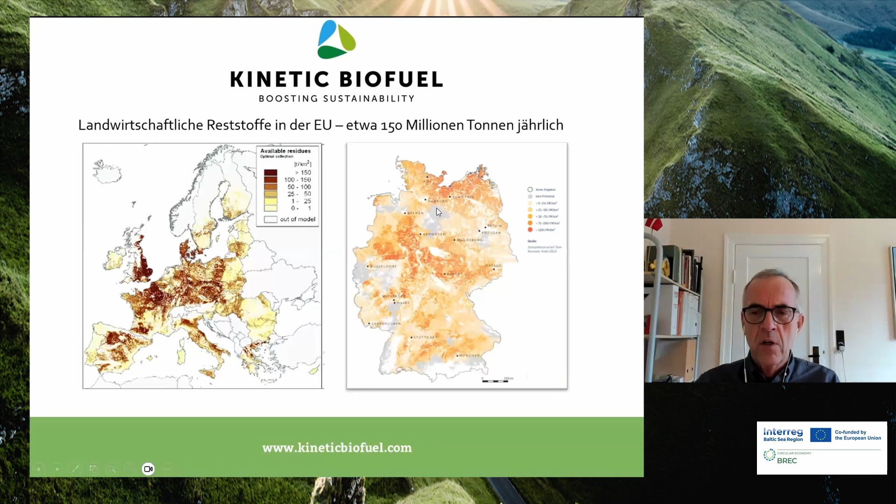If I go into a map of Europe and look for where straw would be available, you have the dark brown places—that's where straw is in abundance. If you look at the UK, the eastern side has a large amount of straw available. Even Denmark has a fair amount, and down in Europe you have areas as well. I haven't focused specifically on this region, this is just one map I have for Europe. Similarly for Germany, the dark orange areas are places where there is abundance and availability of straw.

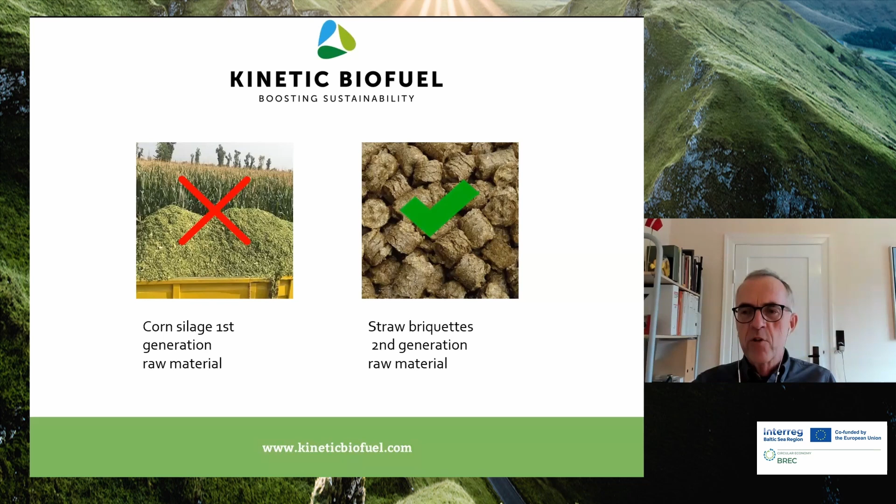Here we have the first generation raw material, and here we have straw already made into briquettes. What we say is that it's actually wrong to grow maize and other crops just to produce gas. This should be used for a different purpose. You should use straw instead, since straw isn't grown for this purpose, it's grown for the grains, and then the straw is a leftover that could be used.

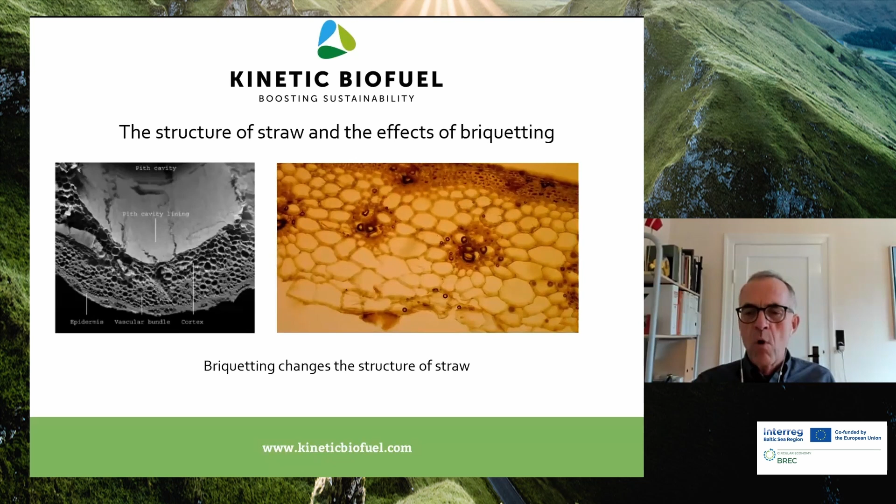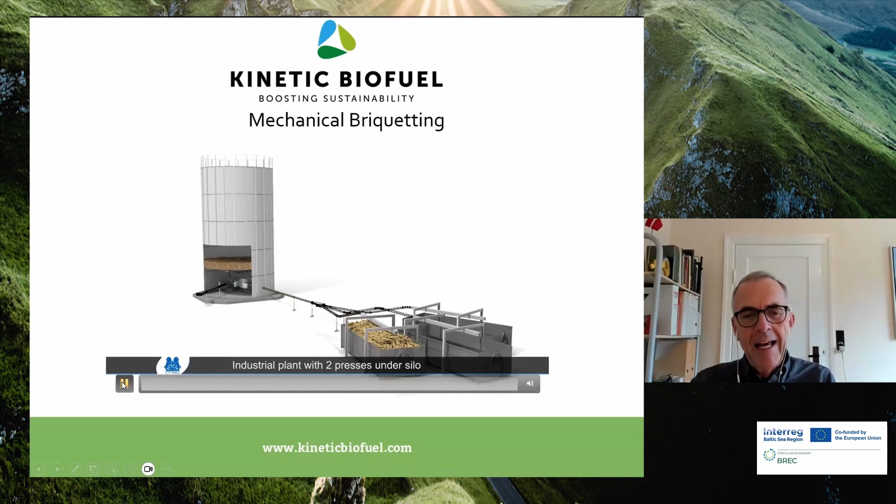Next I have a small video showing a unit of briquette presses, below in a silo. Here you see the raw material coming down. It's divided to two sides, falls down, gets pushed in front of a piston moving forward and back, making one long string of briquettes leaving the briquette press.

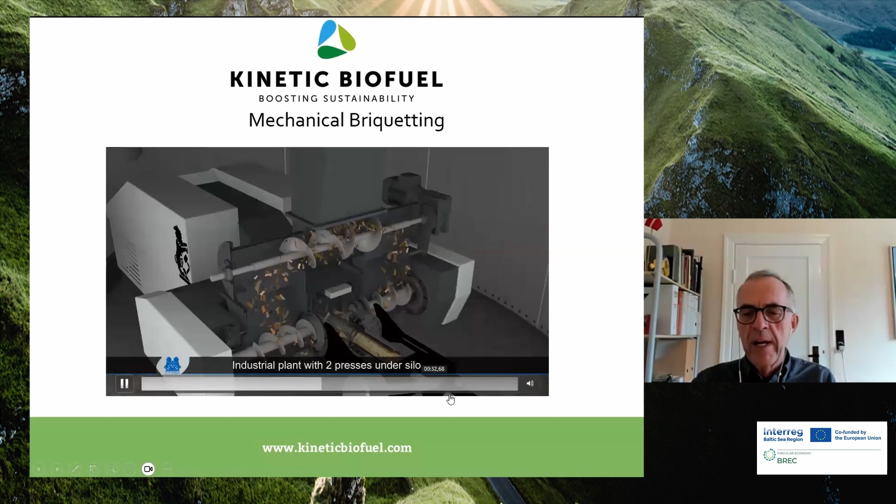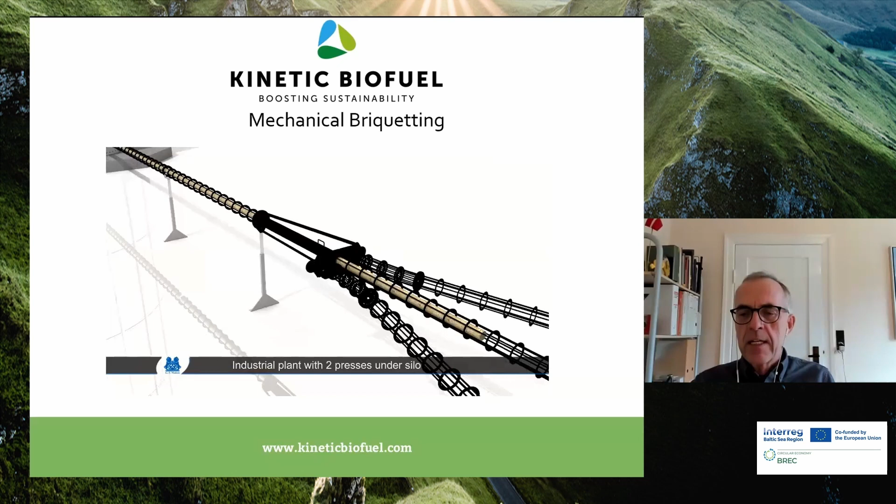In this case, you see it running out on a cooling line, and here it's being put into containers. But if you had it at the biogas plant, you could have it close to the reactor, and even feed it directly into the reactor right away. Very often our clients have them fall on the floor and use a wheel loader to take them to the reactor for feeding.

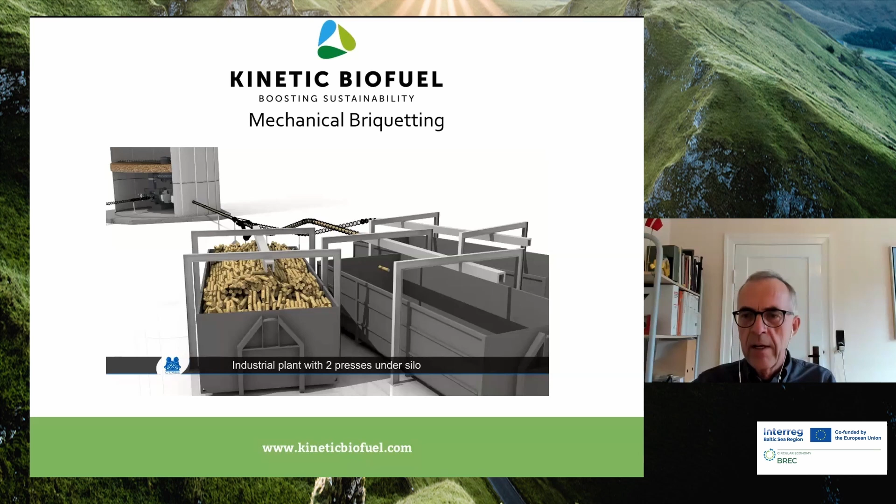Here I have a drawing of the briquette press. This is the center of the briquette press, a mechanical briquette press. It has an eccentric, similar to a crankshaft. When this one moves around, it pushes a piston forward and back. Here is the piston, and in front of it, you form the briquette as one long string.

Strokes of this piston run at 270 strokes per minute. So when the machine operates, it goes boom, boom, boom, boom, boom all the time. And by each stroke of the piston, you break up the structure of the straw.

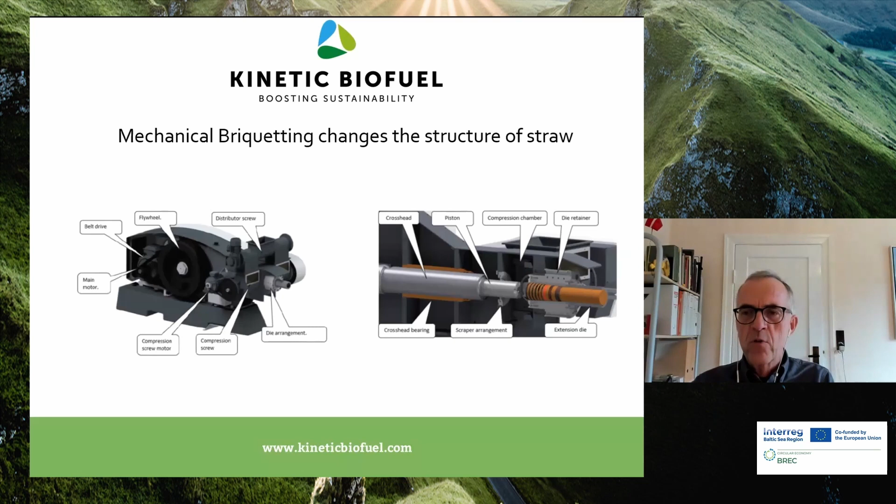Here we take a briquette and put it into water, and at the same time we took straw that was not briquetted and put that into water too. What happens after 5, 10, 15 minutes? The briquette becomes fully absorbed in the liquid, whereas the straw is still floating on top. So here you see that it went from hydrophobic to hydrophilic.

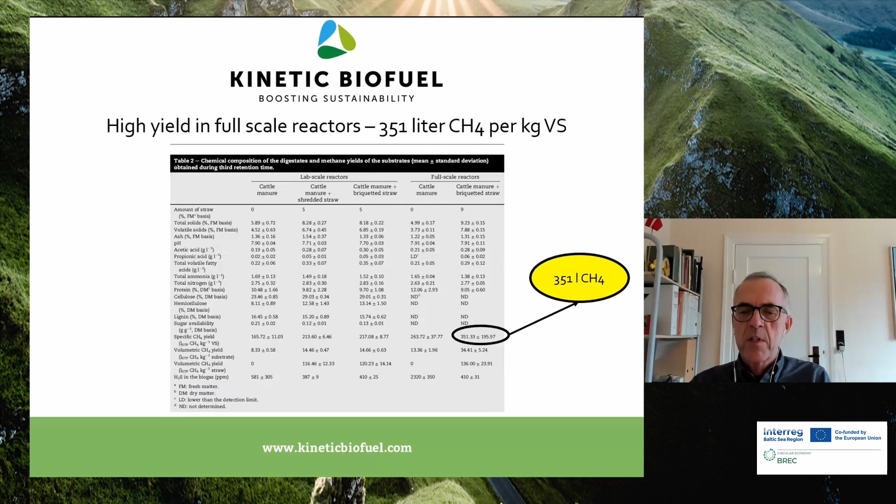A lot of tests have been done over the years with briquettes at university level. Here I took a sample where cattle manure is combined with briquetted straw, and you have this output. These figures can be found on our homepage, kineticbiofuel.com, where there are a lot of university reports that have been done in the past.

In these figures down here, I have the different types of biogas plants, the standard mesophilic and thermophilic, and other different types. Each type of biogas plant produces different amounts of methane. For the thermophilic here, we say it's 300 on this, but again these values can be found in the report. As written down below, the gas yield will definitely depend on what type of biogas plant you have and how it is running.

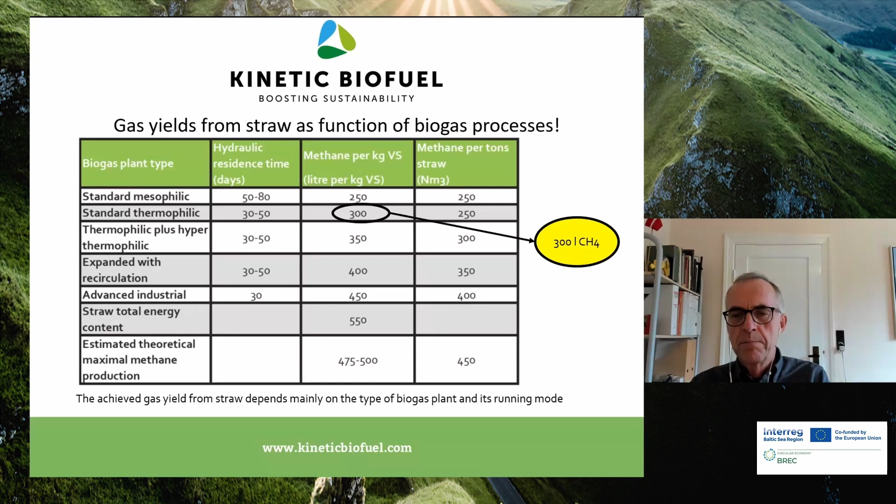At Aarhus University in Denmark, they have a research center, and we had a machine standing there for about 4 years. In this left picture, there is a straw line here behind my cursor. Behind this straw line, the straw comes in and gets taken apart in a hammer mill. It goes to our silo, then from the silo to the briquette press, and then you have the cooling line running away here.

The cooling line, in most years, ran behind the feed box here, and then came up to here, taken above on a conveyor, and at the top of the reactor it was screwed down into the reactor right away. So there was no storing, just usage right away.

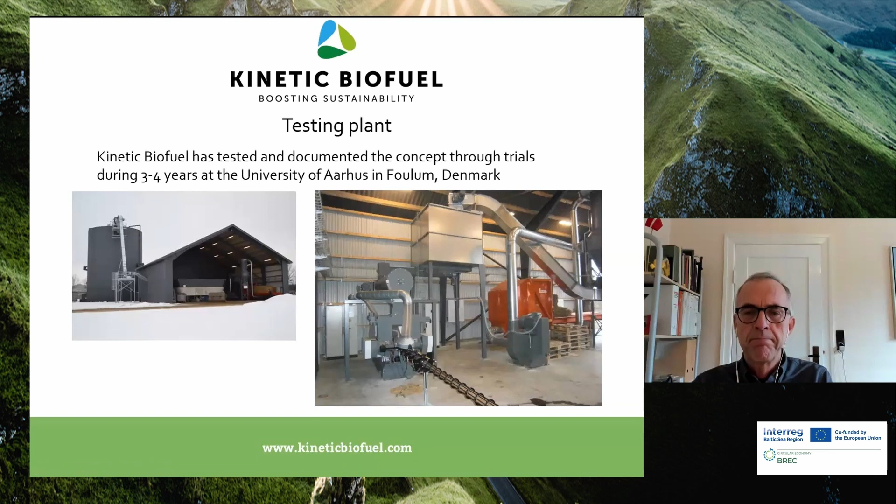What equipment do you then need to make briquettes? I have a line here showing what it typically would look like.

Here you have a bale conveyor. Bales would of course be different from country to country or farmer to farmer. In Denmark, the most common one nowadays is big square bales, around 500 kilos. In other countries it's round bales, but in this case it's shown with big bales. These big bales are put on a conveyor. On this drawing there are 5 bales, each 500 kilo, so 2.5 tons. This briquette press shown at the other end is 1.5 ton.

So that means you had more than 1.5 hours of production just on the bale conveyor, and there's even empty space. Maybe you could put straw enough for two hours production, and then you need to go back and put further straw.

The straw bales are kept together with strings, so either the person putting in the bales needs to remove the string, or you put in an automatic string remover. From here, in the shredder, the straw is taken apart, and when it's taken apart it moves forward.

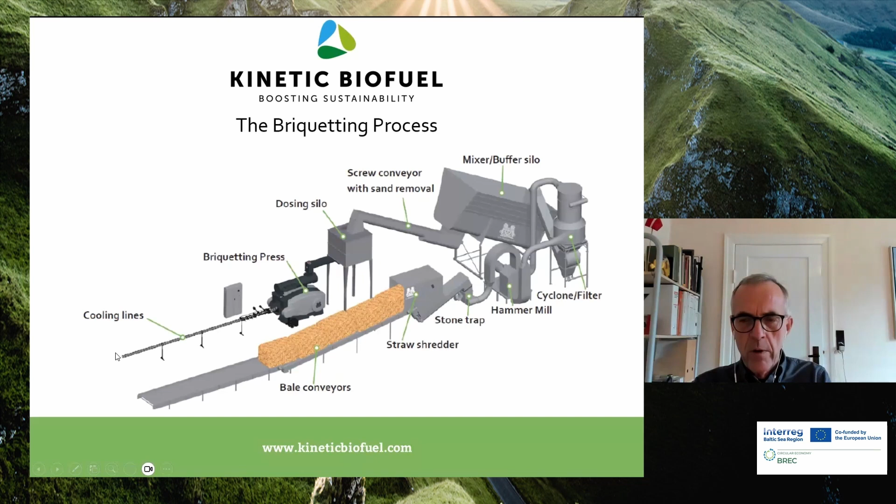What I have on this picture is exactly the same as before. Here I have the bale conveyor, as you see here. And then on the next picture here, this is where it's taking apart the shredder. Then we have the hammer mill, a cyclone here, and then it goes into the mixer. From the mixer it's taken to the silo.

In this case, at Sheppey Island in the UK, they have 2 briquette presses. Each of those is like 1.3 to 1.5 tons, so this is a line of 2.5 to 3 tons an hour.

At Sheppey Island, the briquettes are just taken out, dropped on the floor, and then they take a wheel loader, go in, take a load, and put it into the feed box. Here you see a picture from the feed box. Here you see the briquettes, and here you see cow bedding or cow dung at the other end, and then it just goes into the reactor and is used right away.

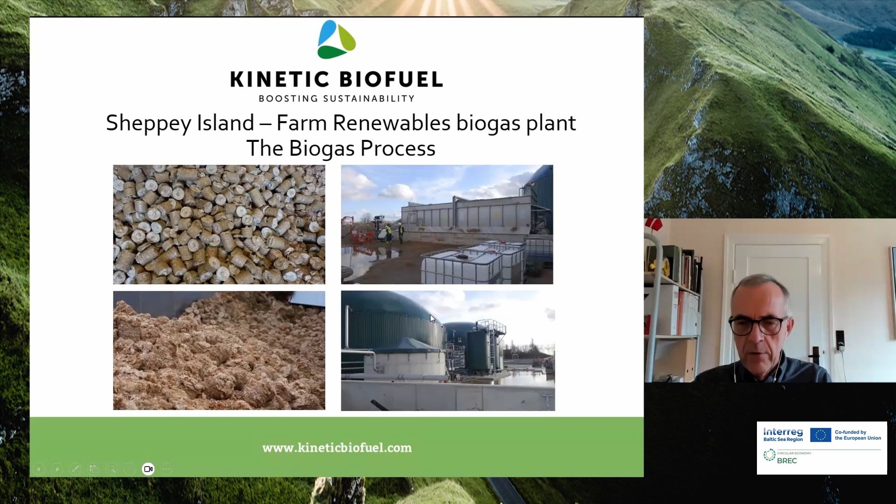What are the costs then of running this?

Oh, sorry for this. Sorry, this is modern technology. You get the telephone both to the telephone and to the computer. So sorry.

What is the cost of running this? We say it's 75 to 100 kilowatts per ton of briquette you manufacture. For doing the briquetting itself, it's around 70-75 kilowatts per ton. When you add the preparation line—the hammer mill, the shredder, and this equipment—then it gets to a total of 100 kilowatts per ton of briquette you manufacture.

Then for labor, we say it's a quarter of a person to 1 person per shift. So in the line I mentioned before, with 1.5 ton, 3 bales an hour, 1 person—if you had a bale conveyor where you could put 6 or 8 bales, then maybe he could come in every 2 hours. If you had 10 tons an hour and didn't have an automatic string remover, you would most likely need 1 person around all the time. But everything depends on how automatic you do it and how good the quality of straw you take. If you use very wet straw in between, you could have problems and need more manpower, so it's a technology suited for better types of straw.

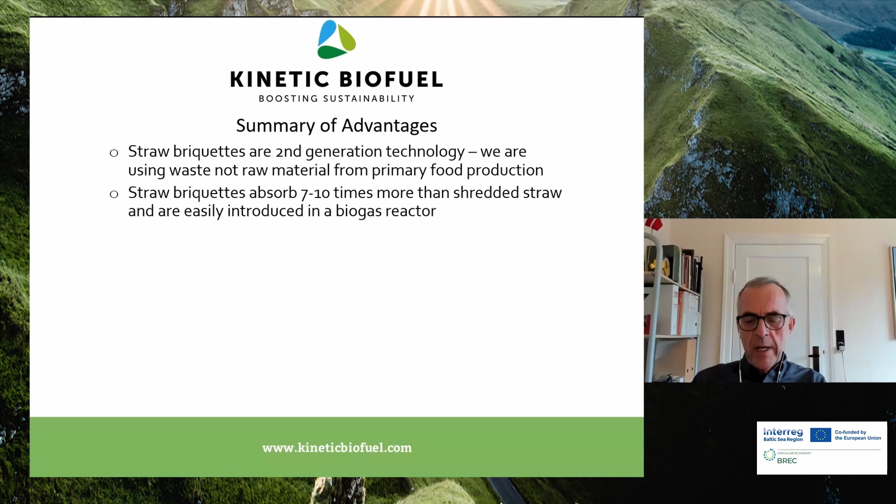Then, what are the advantages? We say it's a second generation raw material, not a first generation one. It's the right way to use waste in gas production. Straw briquettes absorb well after treatment and are easily introduced into the reactor. Straw briquettes can double your biogas production.

If you take slurry and similar material, a lot of the gas potential has often been lost before it gets there, whereas with straw, all of the gas potential is still in the straw.

Straw, after being briquetted, has a logistical advantage. You could produce it and ship it. The briquettes are dense, which makes for easy handling at the biogas plants.

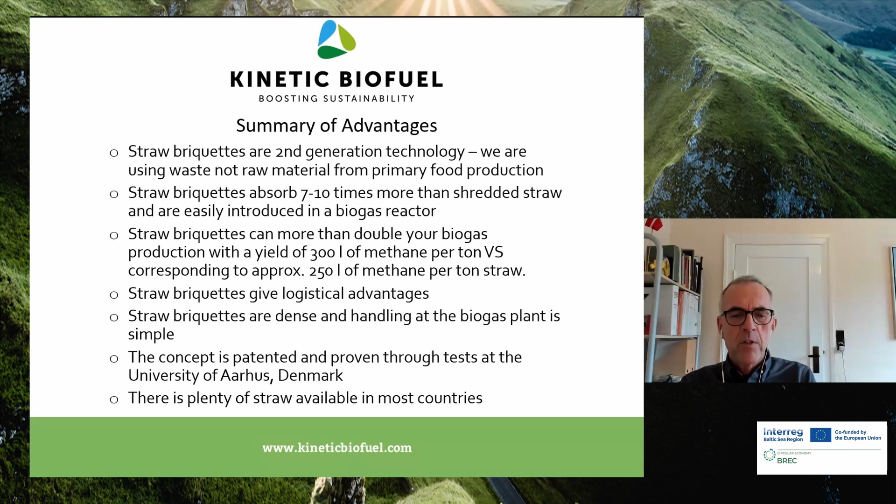It's patented. Even today, trials are being made at Aarhus University, and these trials are done for the moment purely on water and straw, nothing else, just these two substrates. And then we say plenty of straw is available in most countries.

If it's not a lousy harvest year, then Denmark as well.

Then last, who are we? Kinetic Biofuel. Kinetic Biofuel belongs to two companies: 50% belongs to CF Nielsen, a company making briquette presses, and the other 50% belongs to Biofuel Technology. So when it comes to a briquette press for a biogas plant, you connect to Kinetic Biofuel.

I think this was the presentation I had to show you.

I'll just show you what it is that we do at CF Nielsen. This is a briquette, a wood briquette that we use during the winter time for heating up our houses. It could be something similar to this, but when it's for biogas, it's like this. It's made of straw. The quality is much lower than a wood briquette, but after treatment, you can put it into the reactor and it will be absorbed right away.

Yes, please. No, it's okay. Are you finished?

Let me give you a slight update on what's going on for the moment with my colleague at Kinetic Biofuel, Torben Bonde. He's the owner of Biofuel Technology, and he's working on projects.

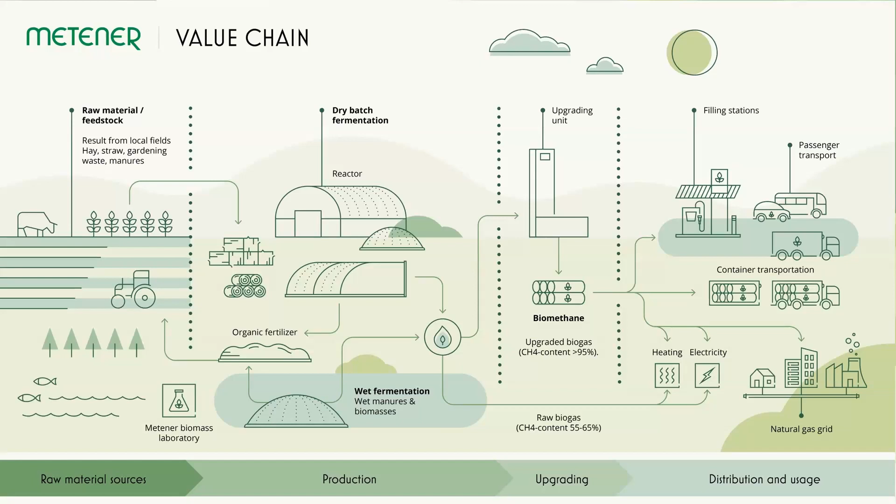Okay, please, next slide. Thanks. Here we are concentrating mostly on two fields: dry batch fermentation plants and developing dry batch fermentation technology, and biogas upgrading and all the applications needed afterward to compress, transport, and utilize biomethane. We can go directly to the next slide.

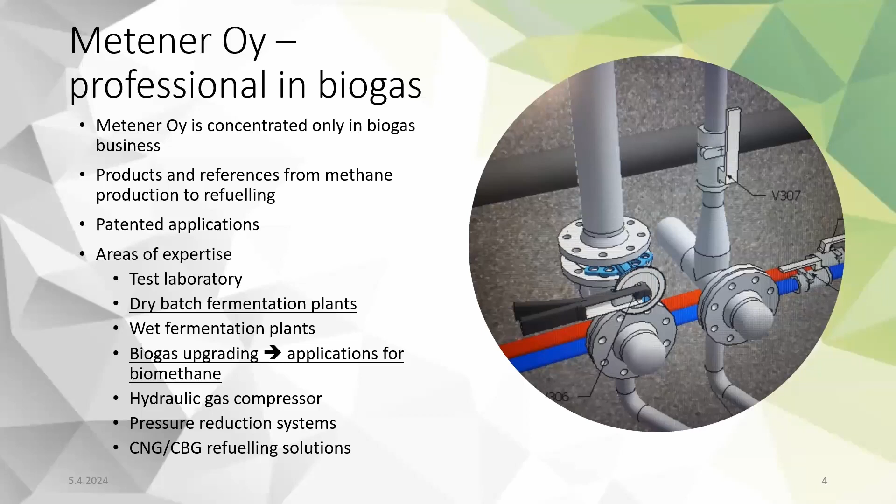It was very nice to hear Henrik's speech about this straw — it was very interesting, and we have found the same situation. We are closing this.

So the biogas feed materials usually are different kinds of industrial wastes from the food industry, other industrial slurries like from the forest industry, and then every kind of municipal waste in slurry form. But we must say that most of those feed materials are already in use in biogas plants, so there is not much potential left.

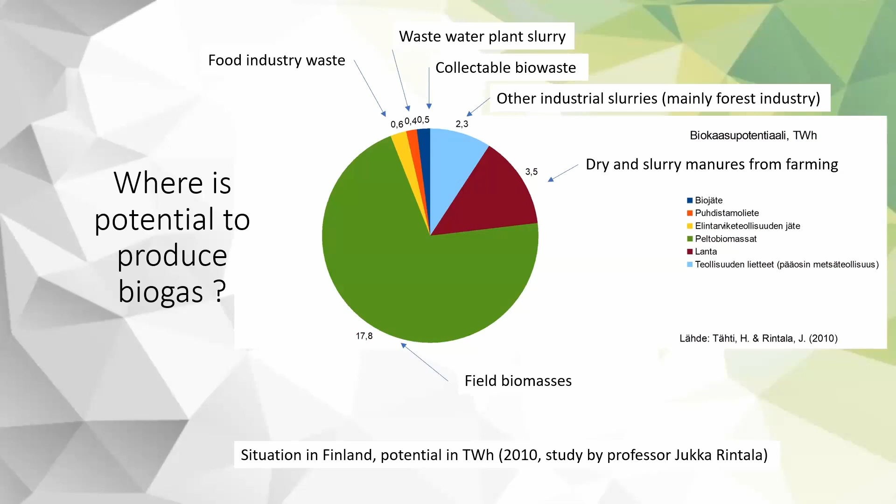But there's a lot of, for instance, straw, and there are areas where there aren't any more cows to feed. So there is plenty of field biomasses available for biogas production, and that's why we are concentrating on dry batch fermentation where this kind of feed material can be used. Okay, now we can step to the next slide.

There's a quite large amount of different biomasses which are suitable for dry batch fermentation. Typically they are slowly degradable, so it's difficult to utilize in wet fermentation, or they are technically difficult to utilize there. For instance, straw is floating and very difficult to mix in the reactor. So there is straw, hay, even grass silage if it's allowed, but there are certain limitations to using it for biogas production.

There are even some wood-based materials which can produce biogas in dry batch fermentation, and of course dry manures. On shorelines there is plenty of reed and cane, for instance, and quite often we are trying to clean out our shorelines from this kind of material, and get the nutrients from the water and transfer it to the fields.

The feed materials we are using there are typically quite dry - dry matter content is 30–40% or even more. And as always in the fermentation process, the nutrients remain during the process. So the digestate we get out from the reactor is valuable fertilizer, or even a little bit better than when it went in, because some part of the nitrogen changes into soluble form, making it easier for plants to use.

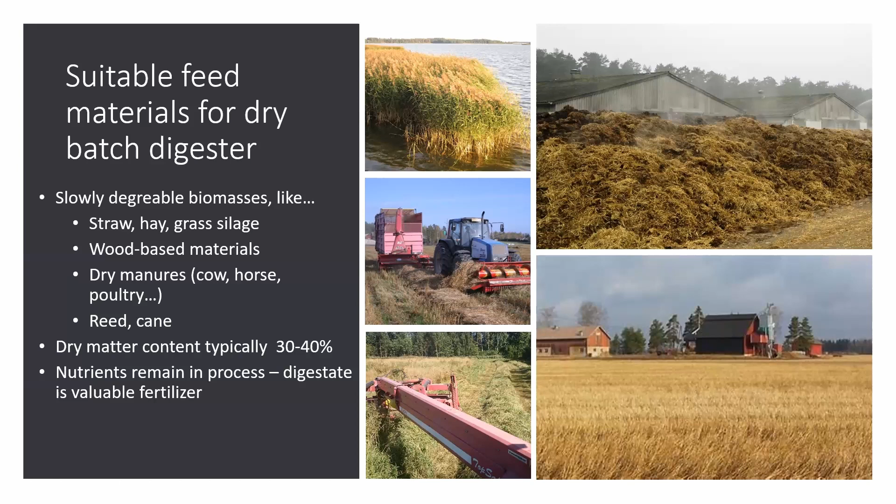We are leading in so-called percolation fluid, which contains the archaeal bacteria that produce the methane. We pump it on top of the feed material batch. It flows through the feed material to the bottom of the reactor, and we collect it from there and send it back to the tank. The tank is kept at mesophilic temperature between 35–40 degrees.

Gas is collected both from the top of the reactor and also from the percolation tank, and it goes to whatever the utilization is for the plant. Typically it's around 3 months retention time for one batch, so it's roughly 3 times longer than in wet fermentation. That's because of the feed material's nature - it takes longer to utilize the methane production potential.

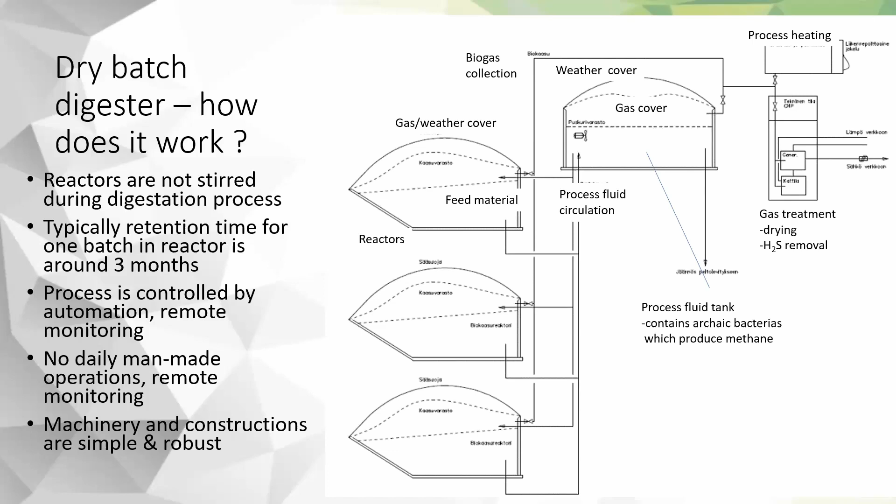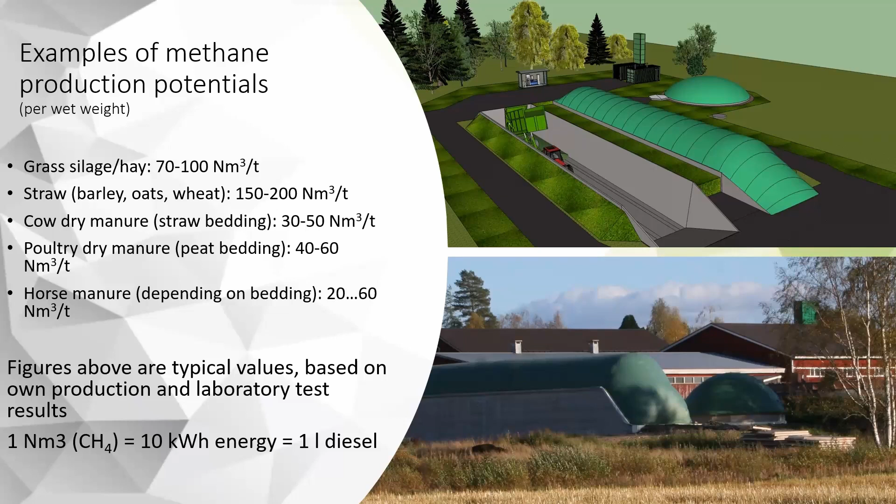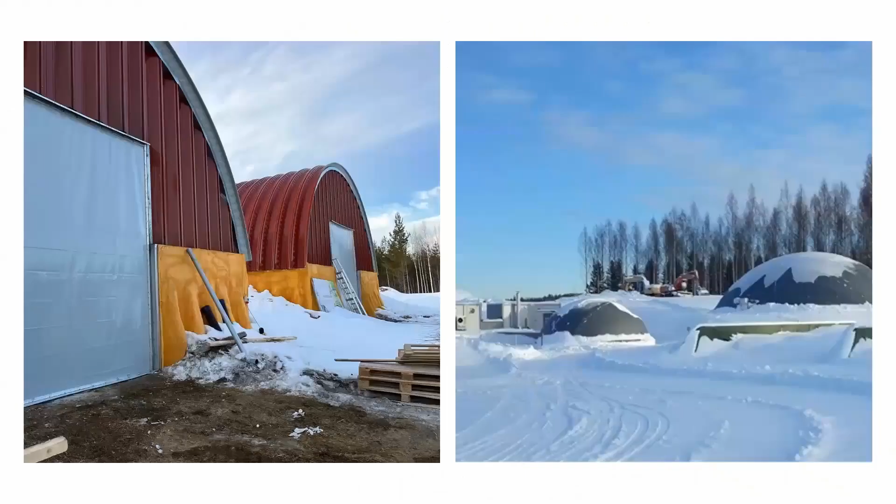Here are a couple of examples of how these dry batch fermentation plants look. On the left side is a plant which is at the moment just in commissioning. They have already started to produce biomethane. There are the first batches in both reactors, and they are closed ones, inside a kind of steel hall or hangar type building. That's quite neat for our environment, and we're eliminating any kind of fumes that could go to the environment, so this kind of plant is easy to build even where there's habitation nearby.

On the right hand side there are open reactors. In the right corner there's the reactor. The size is 12 meters wide, 30 meters long, and 3 meters deep—about 1,000 cubic meters each.

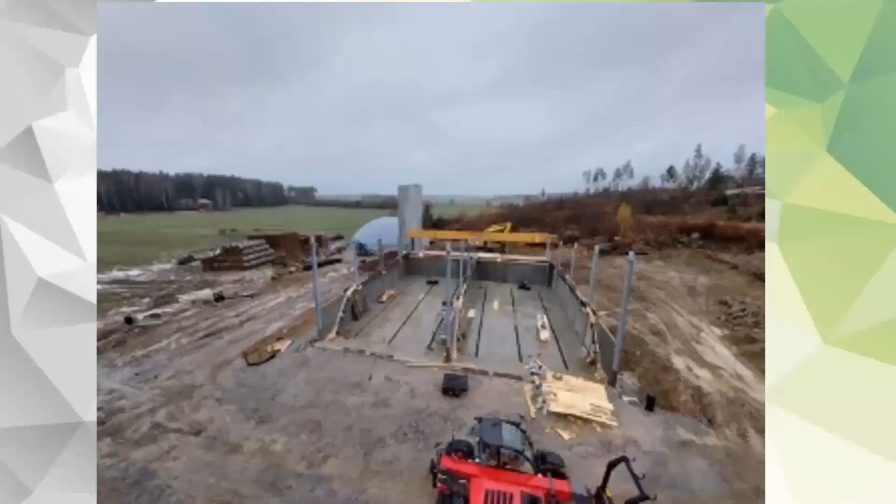Here's a picture from one biogas plant in the building phase during construction, so it's easy to see how the construction is made. It's a quite normal concrete silo, and it's insulated to minimize energy loss. Behind the silos there's the technical room, with gas collection, percolate pumping, and heating.

You can see on the floor of the reactors there are three grooves on both of them. They're for collecting percolation fluid after it has flowed through the batch. It's collected from there and sent back to the tower, which is the percolation tank.

In this application, all the gas is used for heating. The farmer here is growing turkeys, and turkey growing needs a lot of warmth, especially in winter time, so all the production from this plant goes to heating the turkey production facilities.

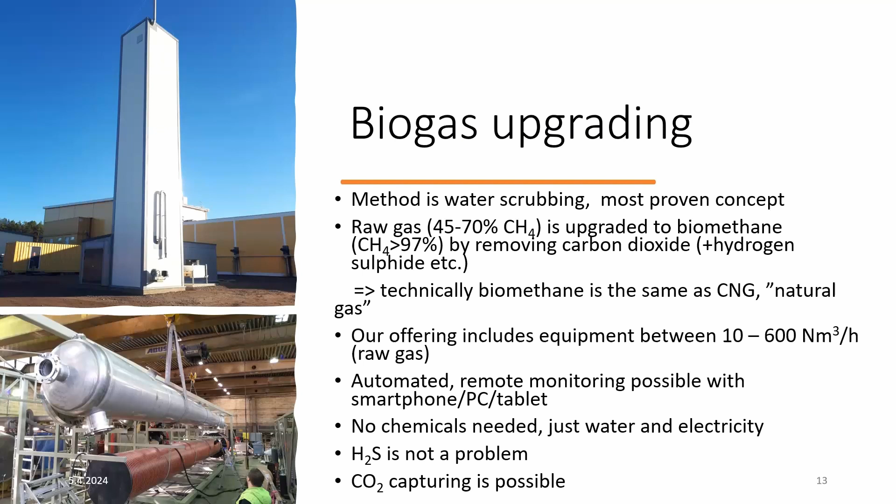So water goes downward and gas goes upward. The water flow washes away the carbon dioxide, hydrogen sulfide, and also a great part of the siloxanes. We collect the biomethane from the top of the column. It goes to gas drying, is odored, and then typically goes for compressing—either for refueling or into a container to be transported for some other use.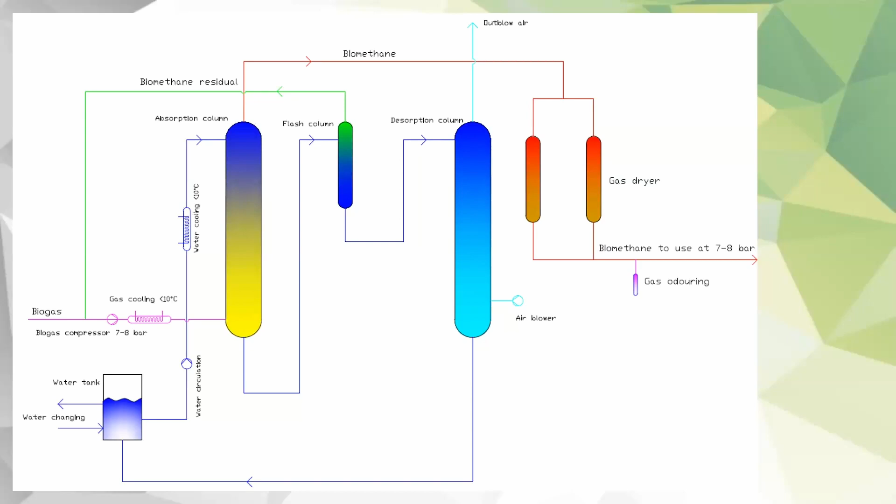Okay, we can go to the next slide, please.

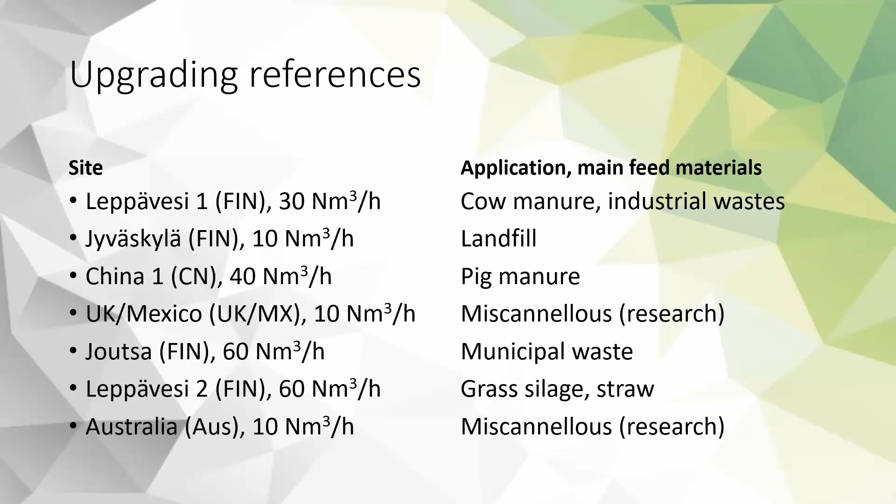We can go to the next slide, please.

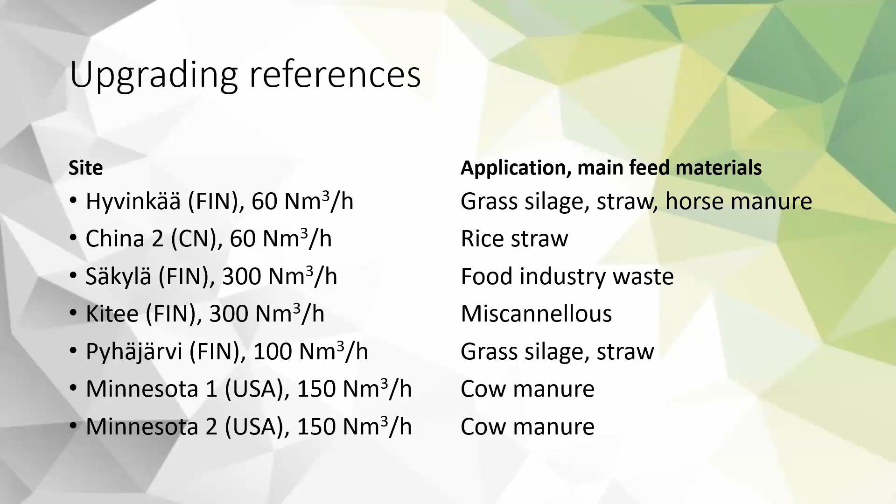Okay, we can go to the next slide.

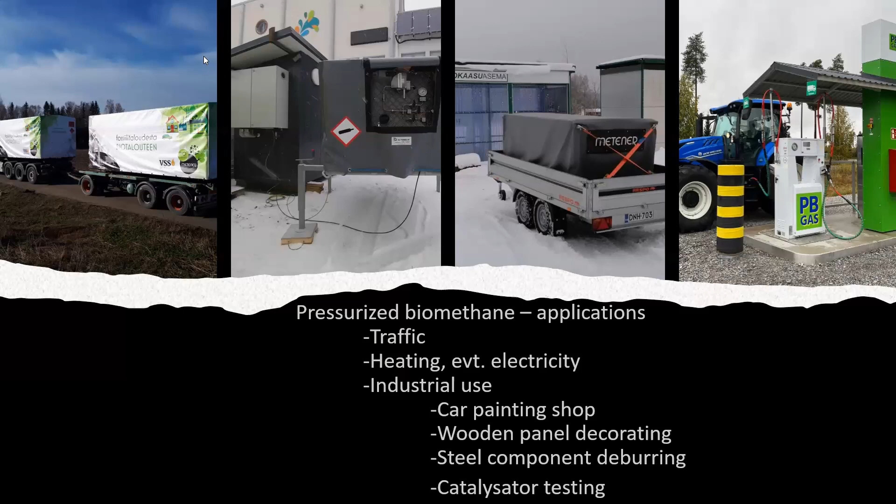At the moment we came to the last slide of this presentation. Thank you for this opportunity to show what we are doing in this biogas field. And now I'm ready for some questions if there are any coming.

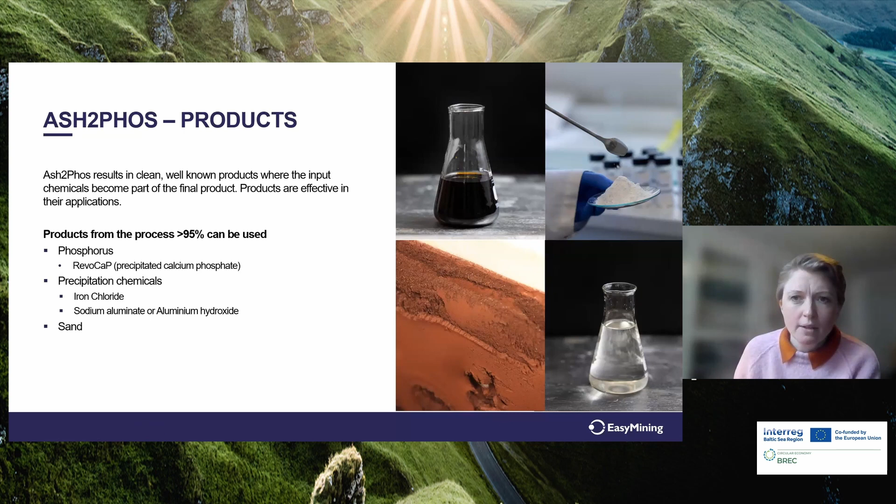The phosphorus, as you see, is very pure. We have taken away more than 96% of the heavy metals that's in the ash. The phosphorus is purer than most of the phosphorus that's actually mined today. It's comparable to Kola apatite, or the phosphorus on the Kola Peninsula.

Given this, it can be used either as raw material in mineral fertilizers, or directly as a slow or controlled release fertilizer. And it can also be used as a feed phosphate. We have done trials there with pigs and chickens with very good results. So the quality is good, the digestibility is good.

However, the European legislation hinders this application due to the origin, not the quality. Here we are now looking into the Canadian market for the feed phosphate, given that it's so well suited as a feed phosphate.

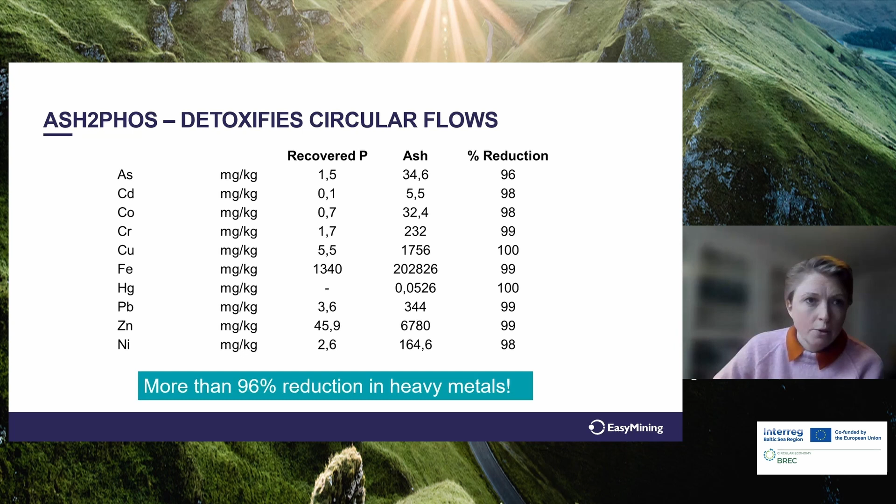To sum up the ash-to-phos technology: we reduce the dependency for importing phosphorus, so we have a domestic production of phosphorus, really. We utilize more than 95% of the ash and recover over 90% of the phosphorus that is in the sewers. And then also, in addition, we recover other important resources as well.

The output products, or the quality of the products - the phosphorus product, the iron product, and the aluminium product - are independent of the ash quality going in. This is also very important, so you have a robust technology. And we separate out the heavy metal concentrate. Also, the process is aligned with the European strategic goals, and also the future legislation that's coming up now with recovery rates and quality.

Going to our next technology, the Aqua2N technology. This is where we remove and recycle ammonium nitrogen from liquid waste streams. We're focusing on liquid waste streams with a high concentration of ammonium nitrogen. So for example, this is from a wastewater treatment plant. The stream that is interesting for the Aqua2N process is the sludge liquor, or the reject water from the dewatering of the digested sludge.

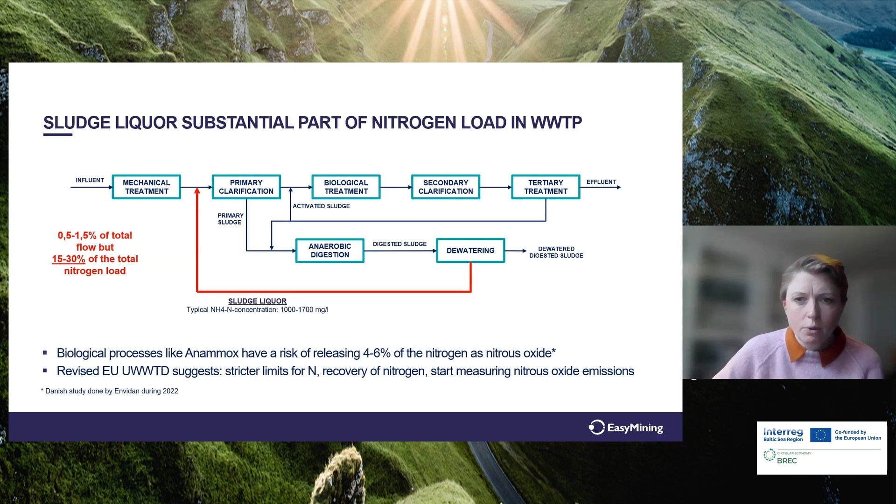That is very interesting. On these waste streams today, if you have some treatment, most of the time you have a biological process that removes the nitrogen, not recovers it. And also, for example, if you have the anammox, you have a risk of releasing a lot of nitrogen as nitrous oxide. What we see now is that there is new legislation coming up, which has both a stricter limit for nitrogen into effluent. You also have requirements of recovering nitrogen and also starting to measure the nitrous oxide emissions for wastewater treatment plants. These are also important things to take into account when looking into how to remove and recover your nitrogen.

The Aqua2N process as such, as I said, it's applicable on liquid waste streams with a high concentration of ammonium nitrogen, and we can lower or remove nitrogen down to about 40 to 50 milligram ammonium nitrogen per liter in the treated water, almost independent of the incoming concentration. It's a chemical process in 2 steps. First we have the catchment step, where we catch the ammonium nitrogen with a precipitant. The precipitant that we use is magnesium phosphate, so we really work with struvite precipitation here.

The struvite is then going into the next step, the conversion step, where we add an acid. So far we have mostly been working with sulfuric acid. With acid, we split up the struvite and regenerate the precipitant, which is sent back to the first step again, so we have a loop where we're circulating the precipitant.

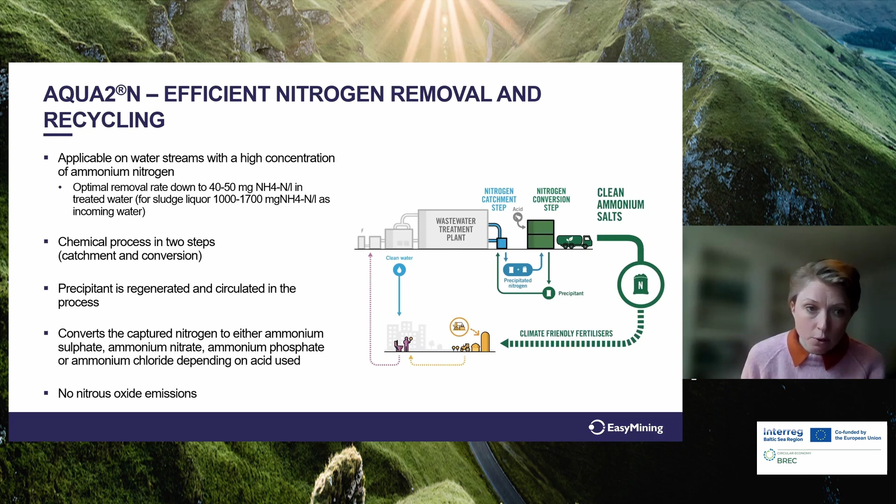And we form the ammonium salt. Working with sulfuric acid, we get ammonium sulfate. We can also work with other acids and get other ammonium salts if that's wanted. One important aspect here is that this process has no nitrous oxide emissions.

Working with sulfuric acid, the ammonium sulfate that is produced is what we have produced in our demonstration plant for the process. It's a liquid ammonium sulfate, as you see on the picture here, of about 40% solution. You can also go to a dry one, but then you need to add a drying step. So in the process, we stop at 30 to 40%, depending on how close to 40 you want to go.

The product as such can be used on its own or mixed or blended with other fertilizers or slurries. We have done agronomic tests, like pot trials, to prove the agronomic effect, which is comparable to, or the same as, conventional ammonium sulfate.

And we've also done an LCA to look at the climate impact, or carbon footprint, which is significantly lower than conventionally produced ammonium sulfate, even before you take into account the reduction of nitrous oxide emissions from, for example, wastewater treatment plants.

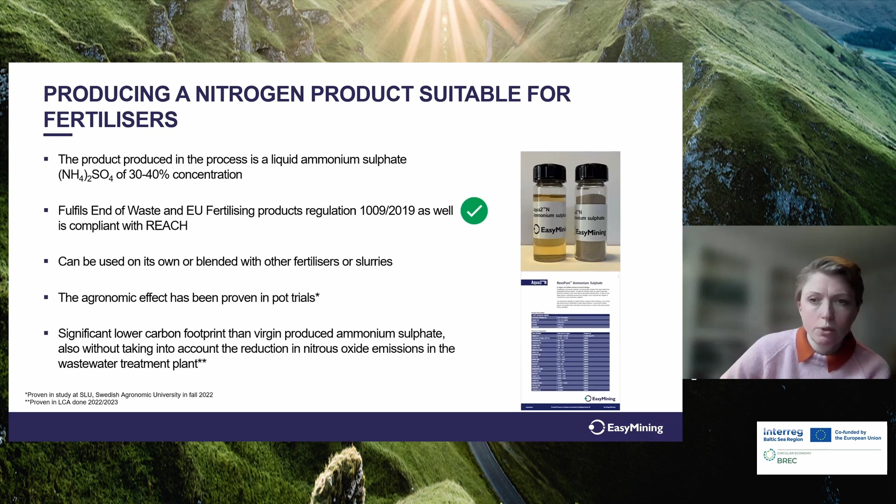To sum up this technology: we remove and recover more than 95% of the ammonium nitrogen. It's a robust process, and it fulfills existing regulations. We have a lower carbon footprint, both for the process and for the product. And it will also help operators, like wastewater treatment plants, to fulfill upcoming legislation.

Finally, the ash to salt technology, where we work with fly ash from incinerated municipal solid waste as feedstock. The fly ash from these incinerations is a hazardous waste due to the very high levels of salt in it. It has on average 20%, but can be up to 40%, chlorides in the ash. They also have heavy metals, which is also one of the reasons for the hazardous waste classification.

Interesting with this one is that the salt content is above the limit for landfilling on a hazardous waste landfill. So this is a very complicated material, or waste, to handle. In Sweden, we produce about 300,000 tons of fly ash annually.

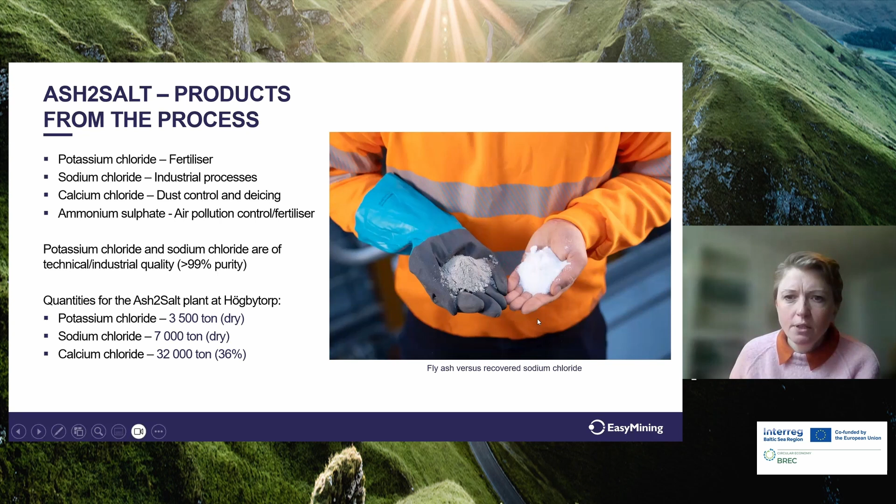And what it can be used for differs from salt to salt. Important to mention also is the purity of salts, which is very important, as we don't want to spread something hazardous into society again. On the picture here, you see the fly ash that comes in versus the recycled sodium chloride.

To mention again the purity, the potassium chloride that we recover has a purity of more than 99%. In the Nordics, we work with GC Rieber, a Norwegian salt company that is offtaking the salts. Important here as well is the carbon footprint of the salts, which is much better than conventional salts.

That was all that I had. Thank you for listening. Do we have any questions?

Thank you, and great job on the presentation. Yes, we have a question. Thank you for the presentation, and the technology is very interesting. Can you talk a bit about energy consumption of the Ash2Salt technology?

You mean figures? No, I don't have the figures in my head. Of course, we use energy. In general I know what is meant, but what we can say is that the Ash2Salt technology is a centralized technology, like a centralized plant.

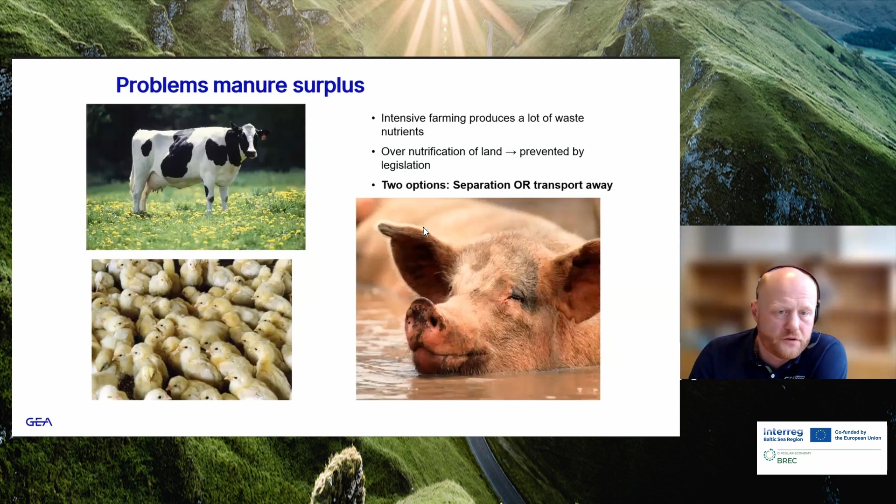When you have a farm, you produce a certain amount of animals, and then produce a certain amount of nutrients. The legislation in the EU sets a certain limit on the amount of nutrients that you can spread on the land, meaning there's an upper limit for nitrogen and an upper limit for phosphorus on the land. So when you produce a certain amount of animals, you produce a certain amount of nutrients, and you need to have land available that corresponds to that production. If you don't have that land available, you have two options: you can take the manure and drive it away, maybe get rid of it at another biogas plant in the nearby county, or you can separate the manure into two fractions, a solid fraction and a liquid fraction. Those are the two options for the farmer if he wants to produce more livestock than he has land available for.

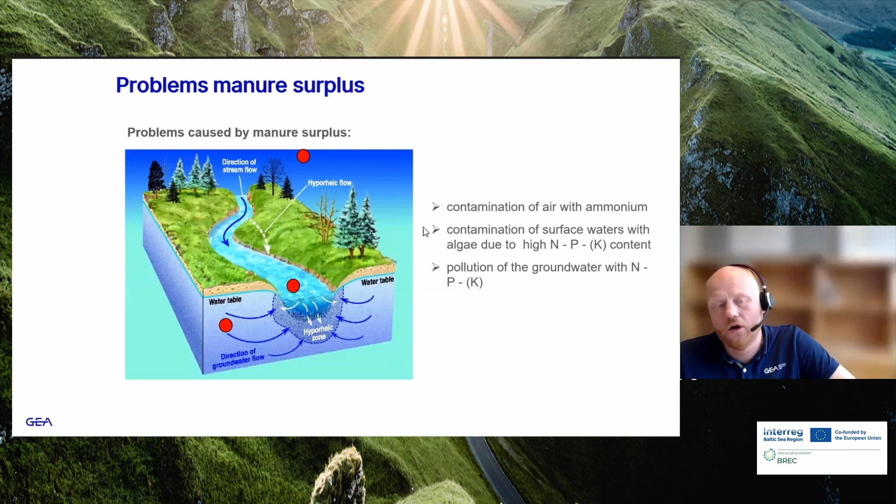I think it's obvious why it makes sense to control the nutrients spread on the land—it's to handle the excess of nutrients. If we spread more nutrients than the land or the crops we grow can absorb, then the nitrogen and phosphorus will go into our water system and pollute it. Eventually the lakes, the sea and so on will die, and the fish will die, and we really don't want that. So we have to control how much nutrients and fertilizer we put on the land.

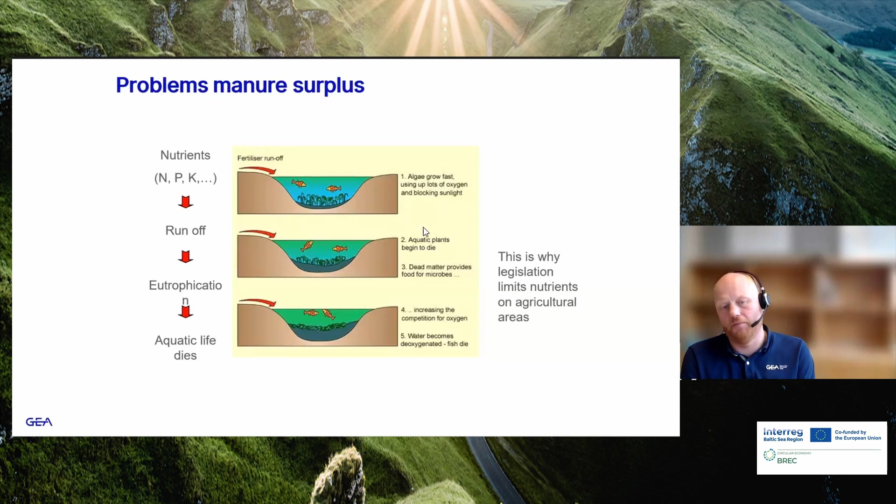It's also very good for when you want to grow Christmas trees, actually. As a starter fertilizer for growing Christmas trees it's very good. So a lot of that is going for that as well.

A new thing that is popping up these days is pyrolysis of the solids, which will actually convert the carbon inside the cake to energy, which can be used for cleaning the biogas upgrade, and also for heating and other things on the biogas plant, basically. Pyrolysis is one of these things - I'm not an expert on it, but what I hear is that you can also do CO2 capture with that technology from that cake.

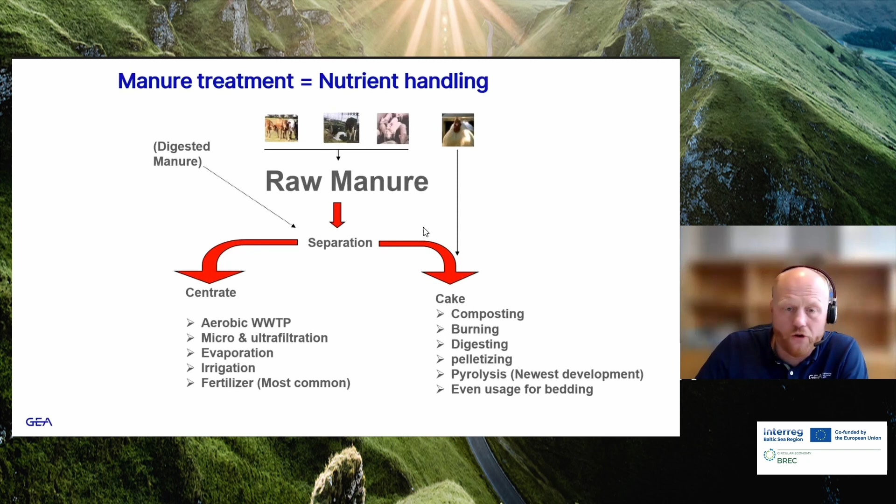And there are actually regional differences. I don't know why, but the composition of pig manure is very different from, let's say, Holland to Denmark, and I think maybe it's according to the traditions you have on feeding the pigs and so on. Cattle is a little bit more similar across Europe, but there's a relatively large difference on the pig manure.

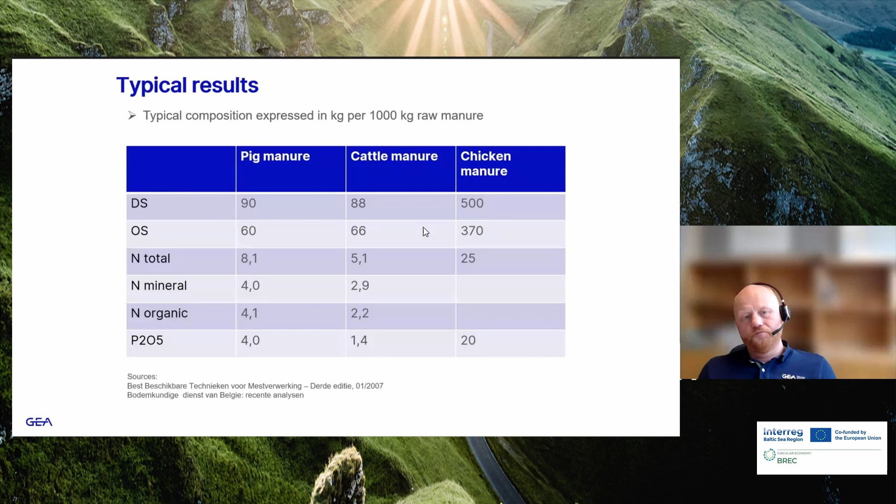So when you have a farm and you want to do separation, the first question when I get a call from a farmer wanting to look into separation and nutrient management is: how big is your need of controlling? How much nutrients do you need to remove from your nutrient balance accounting? And if you say that you just need to remove some of it, then I would advise him to go for the screw press technology.

If he's looking into maximum phosphorus removal, the phosphorus is connected to the particles inside the manure - so the better your separation efficiency is on particles, the better phosphor capture rate you will get. So if you only need to remove some of the nutrients, go for the cheaper solution, which is the screw press or other technologies, but most commonly used is the screw press. If you really need to push it to the limit, you have to go for a decanter. The decanter is a much more expensive technology, especially on the OPEX side, but I'll come back to that. The first question is, how much do you need to remove?

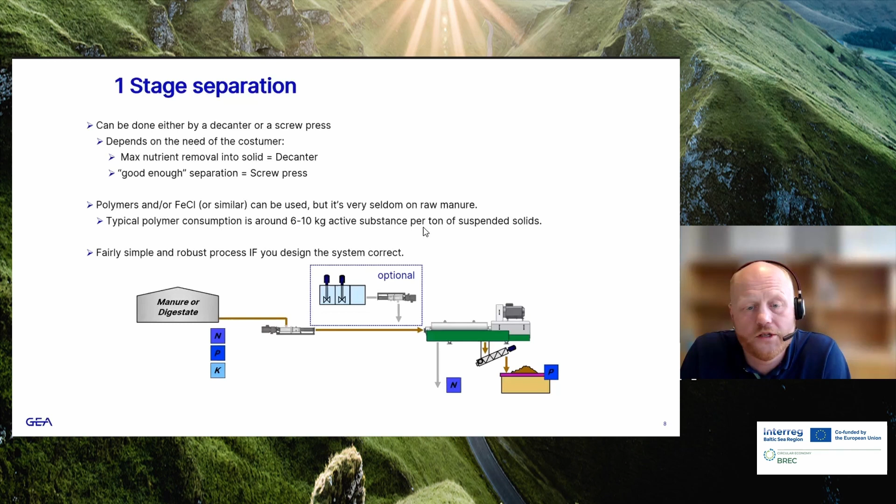So yeah, it's a fairly simple, robust process if you design the system correctly. There's a lot of things that can actually go wrong - manure is a very difficult product to handle, but if you get it right, use the right equipment and design the piping system and your scroll conveyors etc. correctly, then it's actually a pretty simple system and application in our mind.

So this is the typical results that we see with decanters. I put in results with polymers, even though that doesn't make sense, just to give you an idea of the separation efficiency in terms of nutrients, both N and P, and a little bit focus on K - but it's not K which is the most important thing here, it's the phosphorus that's most interesting to look at.

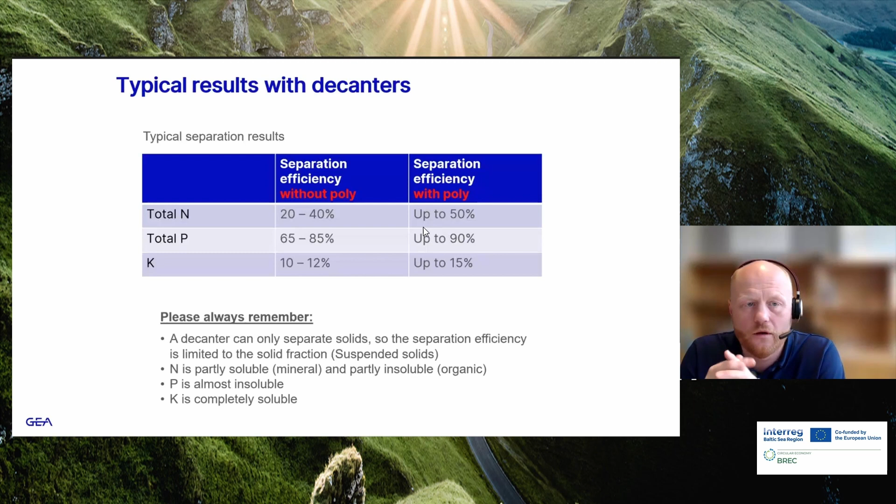I want to put some words on this one, because this is something I've experienced is a little bit difficult for people to realize. When you have a manure, there is a tendency to talk total dry matter. But when you talk total dry matter, there are actually suspended solids, but there's also insoluble or soluble salts and solids. So when I have an example here of 8% DS, up to half of that total DS could actually be soluble salts and solids. And no matter the technology you use for separation, the soluble solids and salts will actually go directly through the machinery which is used. The separation technology can only handle the suspended solids.

This is also today a little bit difficult, especially when we talk about the biogas people, because the biogas contracting people and so on only look at total solids basically, which is kind of a problem.

There is a thumb of rule here. I could have written it in, but the rule of thumb is that when you have a manure or a digestate which is based on manure, then 1/3 is soluble and 2/3 is suspendable solids.

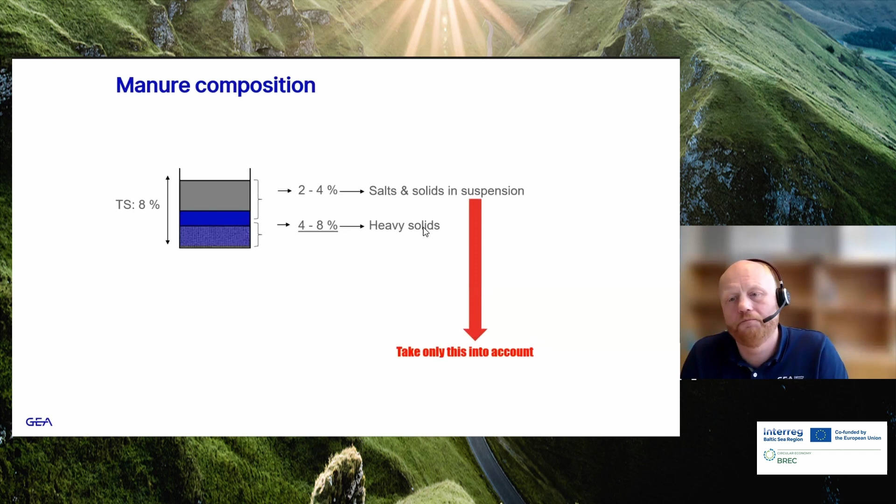The product that comes out of the separation - I have shown mobile units here. We have a vast fleet of mobile units, both for customers and internally. The solids that come out look like fibers. The fibers that normally come from manure are around 30%, maybe a little bit lower, down to 28 and so on. The DS out of the screw press is higher because water follows the small particles, and the separation efficiency for decanters is better, meaning more smaller particles are captured by the decanter - even more when you introduce polymers to the feed for the decanter. So the more finer particles you capture, the wetter the cake will come out of the separation equipment.

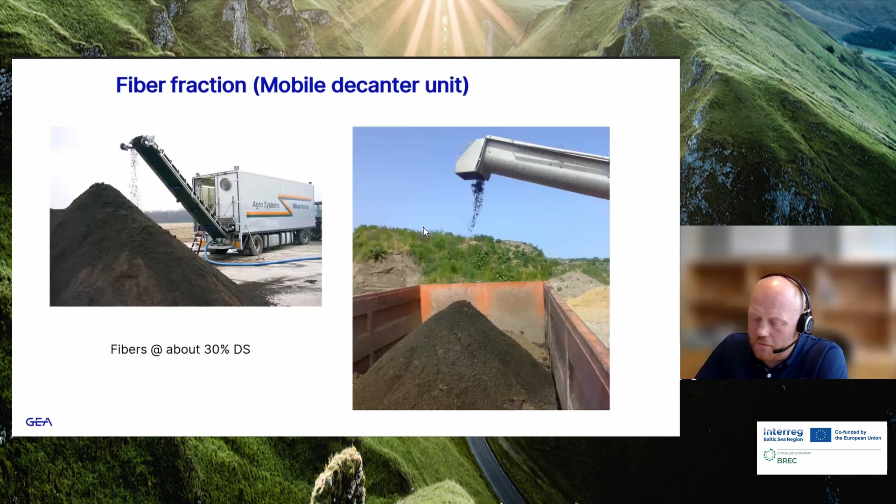Screw presses - there's a vast variety of suppliers and different designs out there. I've shown two here which are quite common: the Börger screw press from Germany, and the FAN screw press. The FAN screw press is a smaller, farm-based screw press, and I think most of them handle 1, 2, 3, 4 cubic meters an hour, maybe more if the manure is a little bit thinner. Really simple, easy to operate machines.

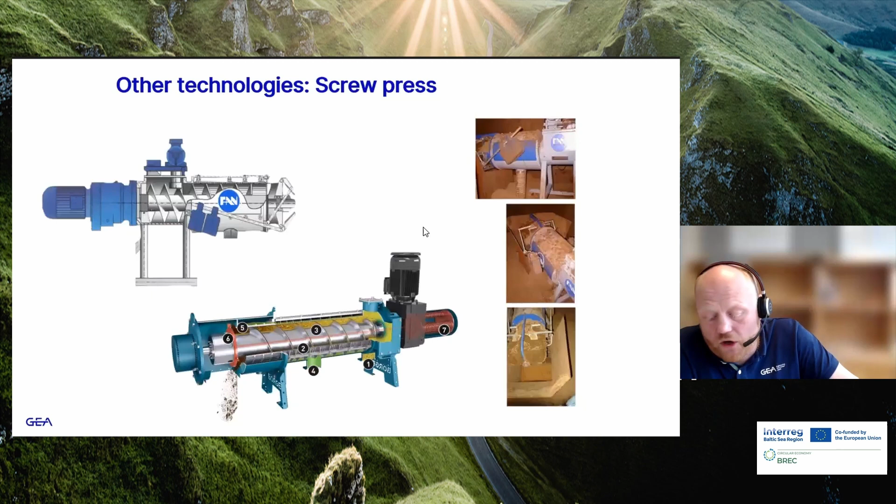The Börger screw presses can be used for industrial uses - we're talking about large scale screw presses here, up to 150 cubic meters an hour of feed they can handle. But there's a huge amount of different suppliers out there, and it's a fairly simple machine. As always, when you talk about a simple machine, the devil is in the detail. So there's a big difference in the design of these machines, but there's a vast variety of suppliers out there.

So the pros and cons regarding the screw press: it's fairly easy, it's a simple machine, it's relatively cheap, and you get high DS of cake. If you are looking for maximum separation efficiency, then this is not the right way to go - you separate mostly the large fibers, and thereby you also have a lower separation efficiency.

To put some numbers on the separation efficiency: what typically happens if you have a one-stage separation with a screw press is that a 250 micron screen is installed, so basically the solids above that screen size will be captured by the screw press. If you go to a decanter, what we see is that the cut is around 30 to 40 microns. So basically we capture the difference between 200-250 microns down to the 35 micron mark as extra with the decanter, which makes a difference in separation efficiency.

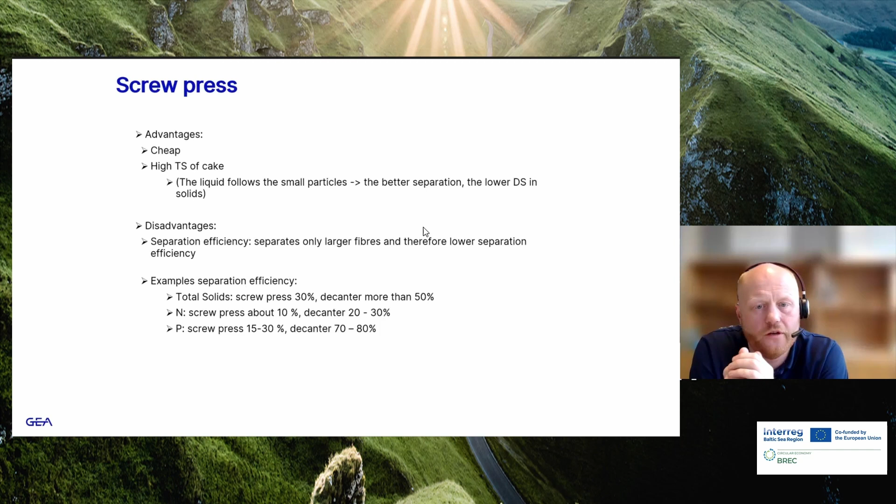20 years ago, 15 years ago, when this was a big thing in Denmark, we saw Kemira introduce a separation efficiency system based on a belt press, which actually utilized a screw press at the end of the belt press. The system used precipitants and polymers and had a really high capture rate. It was sold as a farm-based thing, and at its peak they had 35 to 40 systems running in Denmark on farms, but none of them are actually working today. There's been a big shift in the industry, and most of the manure today goes to biogas plants.

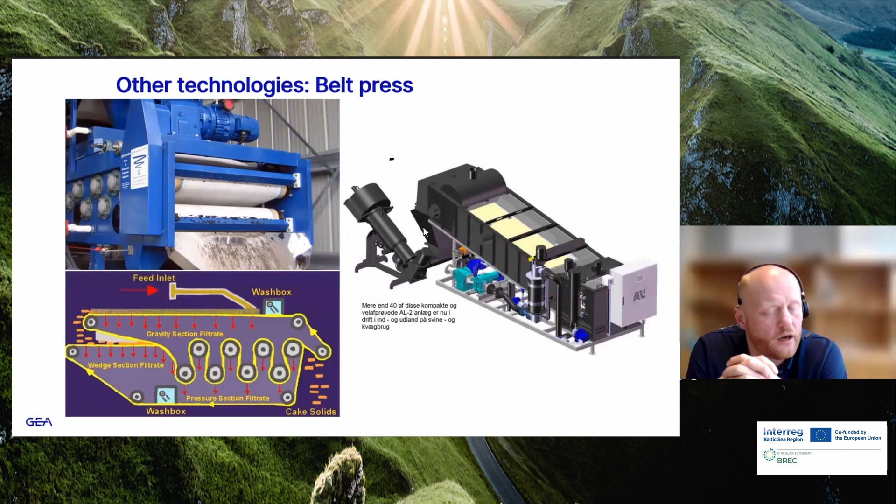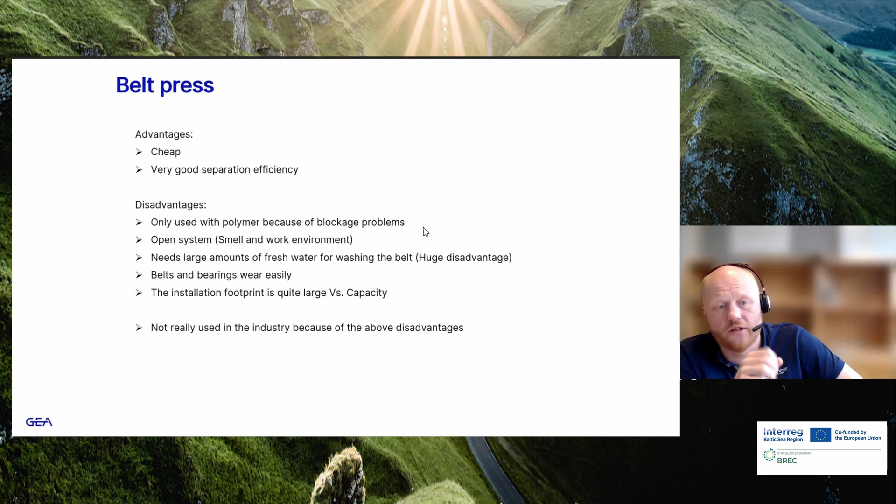So the nutrients handling is done within the biogas plant. It's a cheap solution with very, very good separation efficiency. If I had to match that efficiency with a decanter, I'd have to add polymers to match what you can get out of the belt press. There's a lot of disadvantages with the belt press, which is also why they're not running today. The main thing is that it's an open system. It really smells a lot, and when you separate manure, the nitrogen in the air is really bad. The air inside these containers and separation systems is extremely bad and not nice to work with.

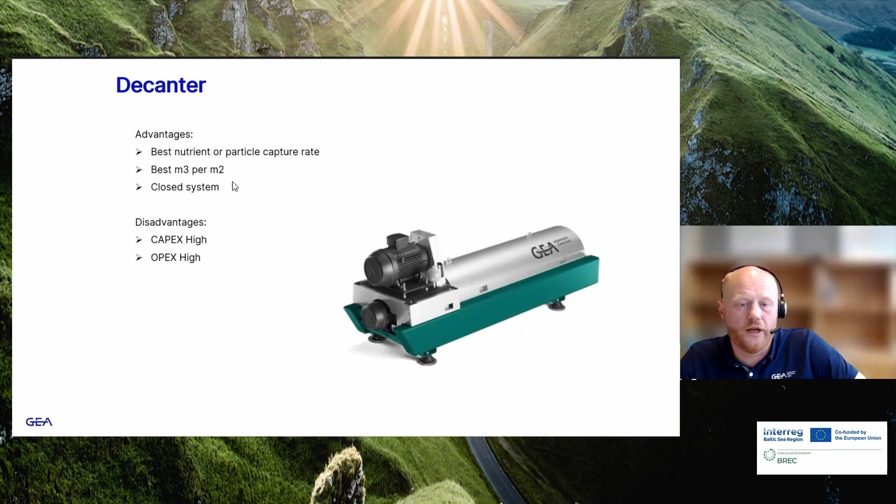Then I'm moving on to the separation of digestate from biogas. There are a lot of drivers in this industry, and biogas is a growing thing, especially when we saw that Shell acquired Nature Energy, which is a large scale operator, maybe one of the biggest contractors in the world. When you see Shell moving into that industry, it's because they see that biogas is a big thing for the future, and it will also require a lot of nutrients handled.

When we talk about biogas plants, there's a big struggle in Denmark to get enough feed to feed all these plants. So they're not taking nutrients only from the farming industry - they're taking nutrients from household wastewater, canteen waste, and so on. All these waste streams they take into the biogas plants create an excess of nutrients on the backside of the plant. So utilizing manure in these biogas plants actually increases the problem of nutrients handling, and that's why we see a growing interest in utilizing separation on the backside of the biogas plant.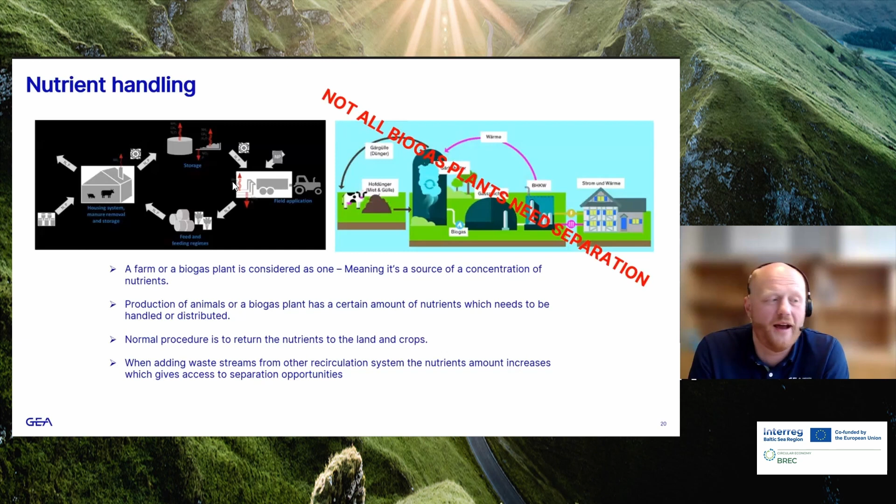Until Corona, there was a big problem in Denmark with nutrients, especially phosphorus. There was a big excess of phosphorus in Denmark as a whole. But we removed the minks from Denmark, and that actually removed 25% of the whole phosphorus amount in Denmark - 25% overnight, basically. So today, if you look at the whole country, there's a balance between the nutrients we produce in farming and what we actually have of land available.

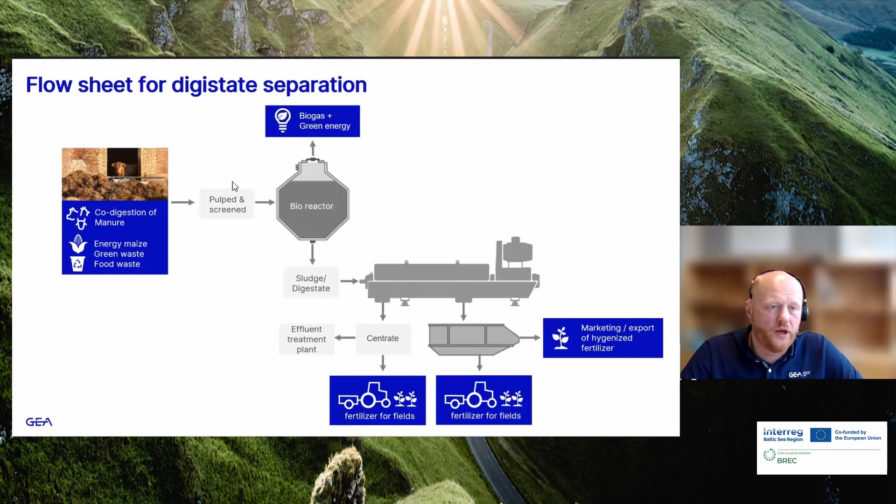Yeah, it's fertilizer. Today it's going for fertilizer. It's kind of the same thing as I did today.

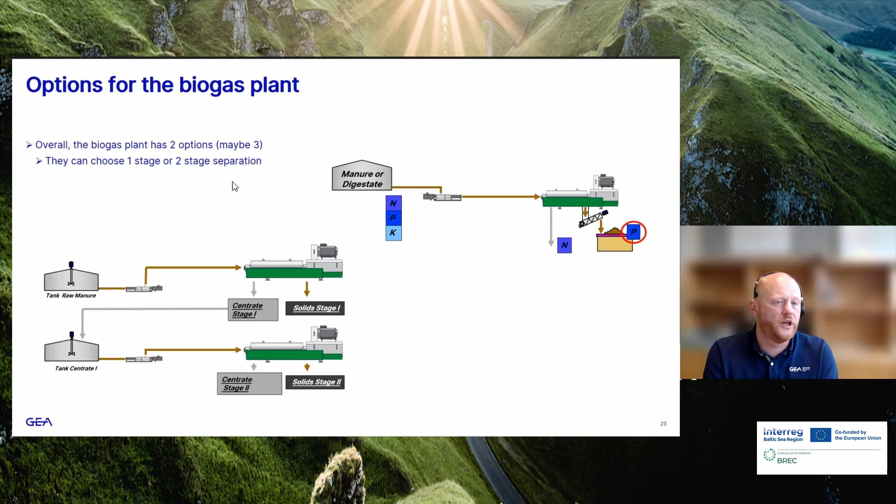So the biogas plant, when they are going for separation, has these two options. Normally we actually see biogas plants that use a double decanter setup. There's pros and cons, especially if you want to use polymers before the second stage - if you have the first stage where you remove most of the particles, then the polymer consumption is lower compared to a screw press versus decanter setup like we have here.

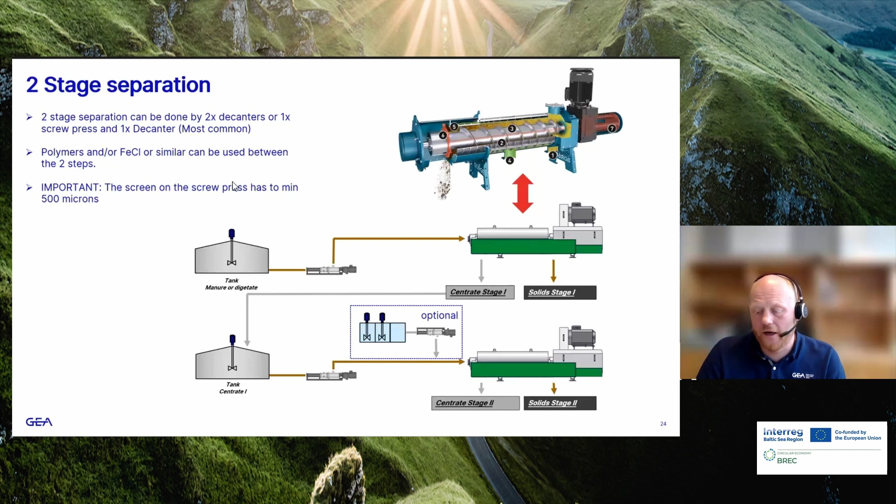The first stage can be exchanged by a screw press, but we actually see that people who need to use polymers for the best possible separation efficiency go for a double decanter setup, which is more expensive on the service side. But if you actually need it, this is the best overall performance you can get from a separation system.

Basically, we have biogas plants which are completely based on food waste, and there you need to evaporate the water to the end, so you actually end up with a solid fraction of nutrients which can be handled then. So what we see now is that we have inquiries coming in about what we can do more on the separation, and there we are looking into the third step. Our friends from Flottweg have a machine available for doing that, and we have a disc stack centrifuge available for polishing the centrate even further. So this is something we are working on, testing, and looking into introducing to the market actually.

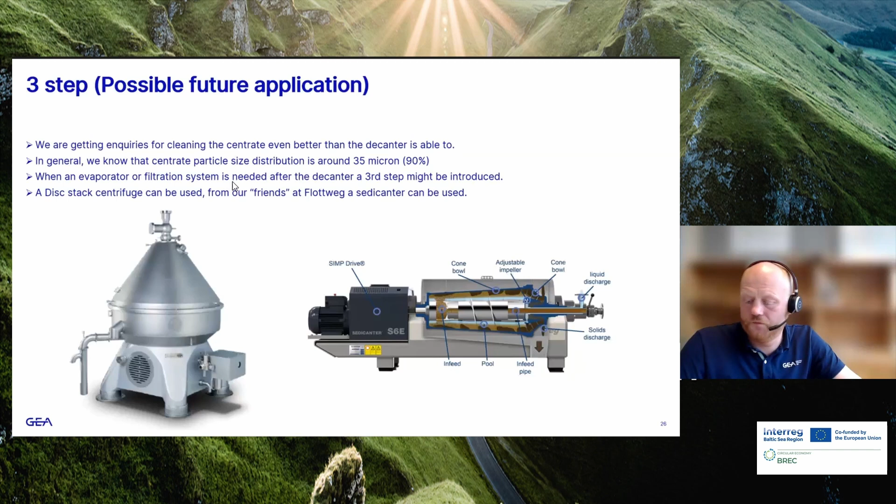End of my presentation. I think there was a question.

Richard, thank you very much. Thank you, I was asking for a question, but thank you for your presentation from your 15 years of experience point of view. I have a question actually. You said that you guys are not cheap, you are expensive. If I'm a farmer approaching you, there's a question about 1 or 2 stages of your technology. I mean, when it's time to speak about a 2-stage setup for my business, let's say.

The large scale farmers in Denmark, the biggest pig farmers in Denmark, are quite big actually. If we take that as an example, basically a machine for those guys, when we're talking a full system here, will cost 300,000 euro, including the container with all the screw conveyors, pumps, electrical installation, and so on. So it's quite expensive, and we have seen that the service cost, because there is very high wear and tear on the machines in this application, is around €1 per cubic meter. That's very large, very much on the service cost. It's very hard.

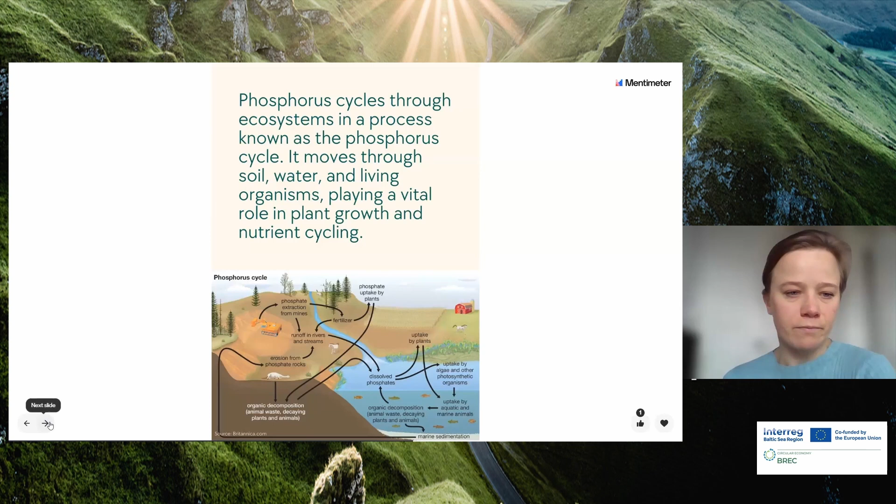Playing this vital role that is explained also in the first page, this is a picture that shows our phosphorus cycle. Then in the third page, we highlight some of the challenges, focusing on its importance for food security, and also how phosphorus is increasingly contaminated with cadmium, for example, and how there is geopolitical insecurity with phosphorus due to the locations of the reserves.

The second challenge is eutrophication, and how extensive use of phosphorus can give us bad conditions in our water reserves. And the last challenge we highlight is inefficient use, with the main focus on the linear use of phosphorus, rather than the circular use that we aim for. So these are the three main challenges that we focused on.

Then in the last page, we talk about struvite extraction as a solution for achieving more circular use of phosphorus. Struvite is highlighted as an example, but we can also include more solutions to the phosphorus problem. So this is the brochure that we would like to have some feedback on.

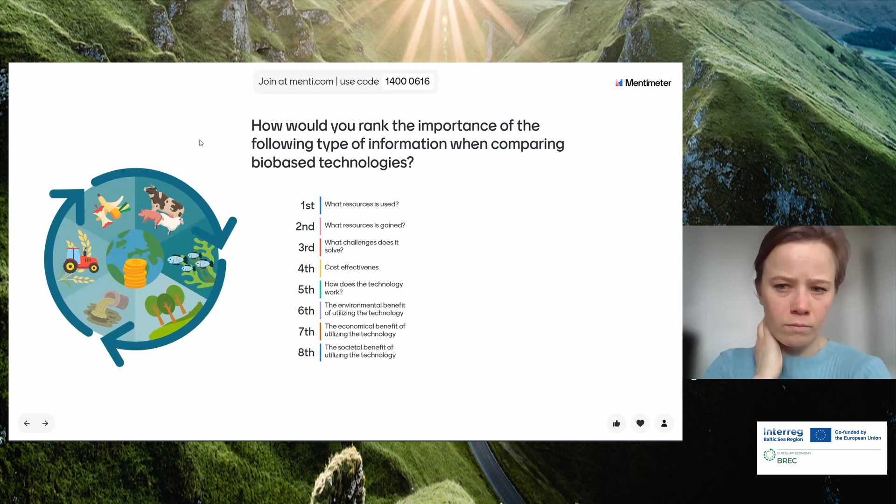Let me know if there is anything unclear, I will try to explain. Great, I can see a lot of results coming in. 17 responses, 18.

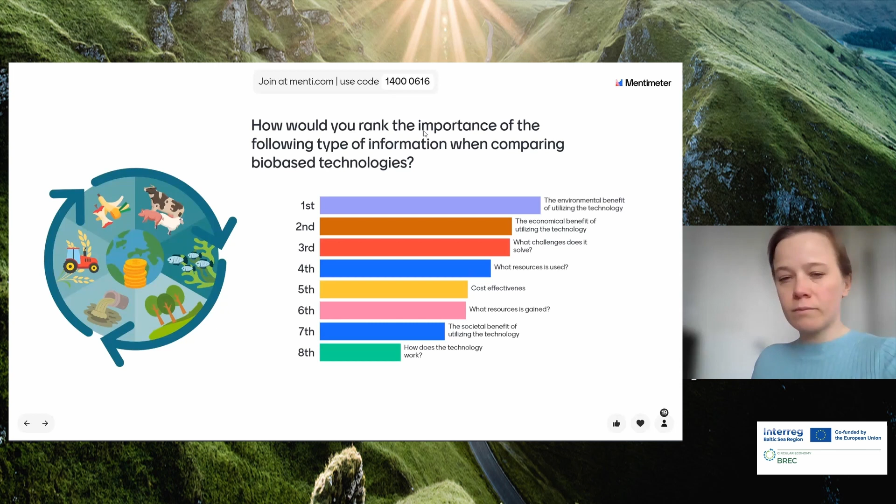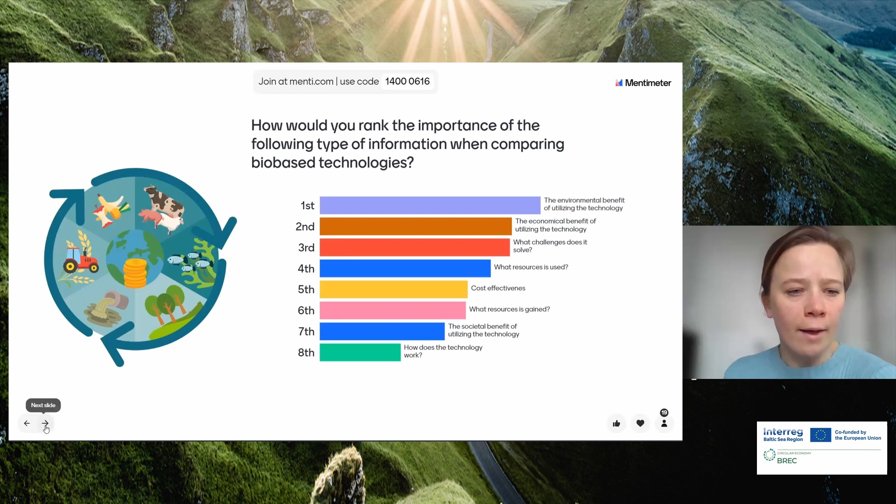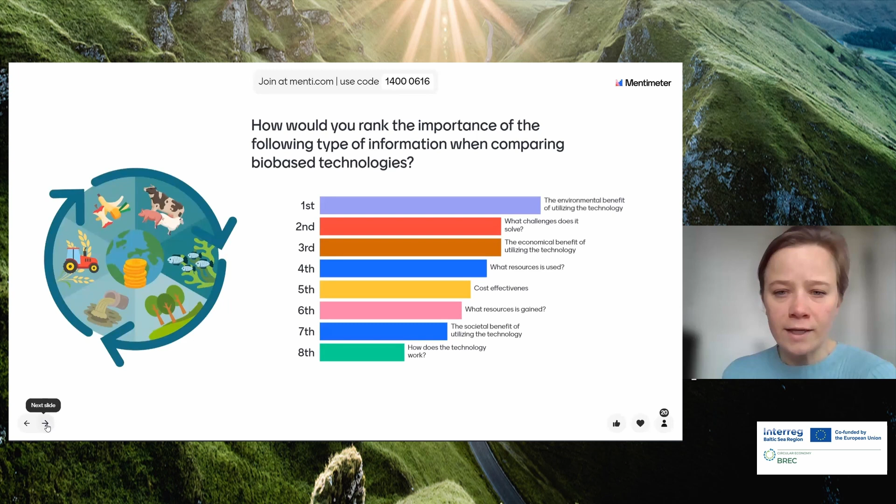I think it's pretty clear that the environmental benefit of utilizing the technology is the most important thing to address in these info brochures. So that was actually my last slide. If everyone has put in the response, that was one more. I think I will finish this then. Stop share. So thank you very much for all your responses.